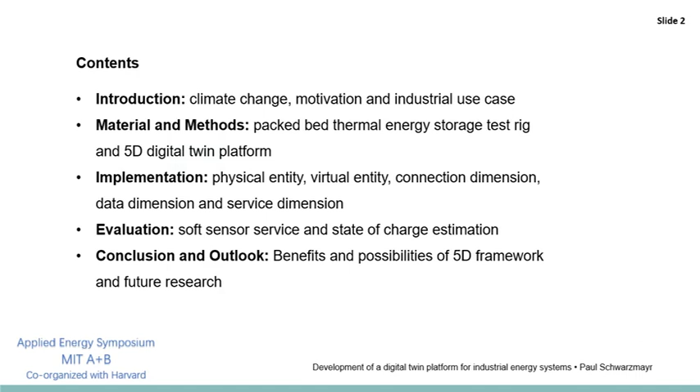To reach the goals defined in the Paris Agreement, global CO2 emissions need to be reduced by more than 75% until the year 2050. More than 40% of the CO2 emissions in 2019 were emitted by the industry sector. Nevertheless, there are existing technologies and technologies in their research phase which show high potential to reduce CO2 emissions of industrial processes by a fair amount.

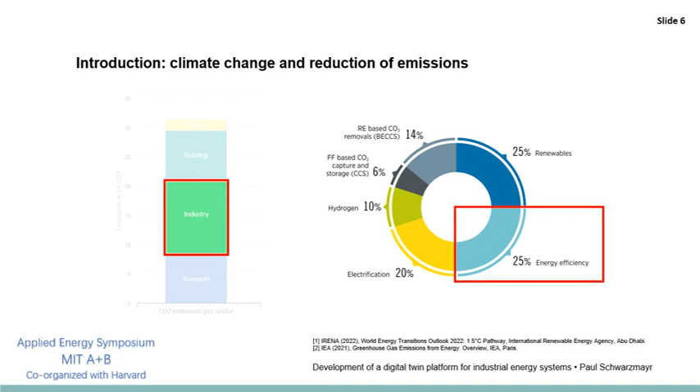As stated in the IRENA World Energy Transition Outlook, 50% of the CO2 emissions in the industry sector can be reduced by the transition to renewables and the increase of energy efficiency. In most industrial processes, an increase of energy efficiency can be achieved by the reduction of primary energy consumption and the recovery of waste heat. The fact that the generation of heat is often accompanied with a high exergy loss makes the recovery of waste heat even more important.

Let's consider a more tangible use case for this purpose. On this slide, the last few steps of a steel producing process, the so-called Linz-Donawitz or LD process, are depicted. The left side shows the current status of the process, which we will consider first. Besides the main product, steel, the LD process produces a considerable amount of slag and crucible gas.

The crucible gas, which exits the process and is mainly composed of carbon monoxide and a considerable dust load, is utilized in a cooling chimney to produce process steam via radiative heat exchangers. Due to the high dust load of the crucible gas, convective heat exchangers would erode quickly, and therefore a further cooling can only be realized by injecting water in an evaporation cooler, which results in a substantial amount of waste heat.

The idea to solve this issue is to replace the evaporation cooler with a packed bed thermal energy storage, which enables the storage and recovery of the waste heat in this process. In contrast to convective heat exchangers, the packed bed storage is insensitive to the high dust load of the process gas, and to make things even nicer, utilizes the slag produced by the LD process as storage material.

With all these advantages and benefits, there are also considerable difficulties and challenges which arise when operating a thermal energy storage under such rough conditions. That's why the main focus lies on the implementation of a digital twin for a lab-scale packed bed storage, which will provide a platform for specialized services like fault detection algorithms and adaptive simulation models.

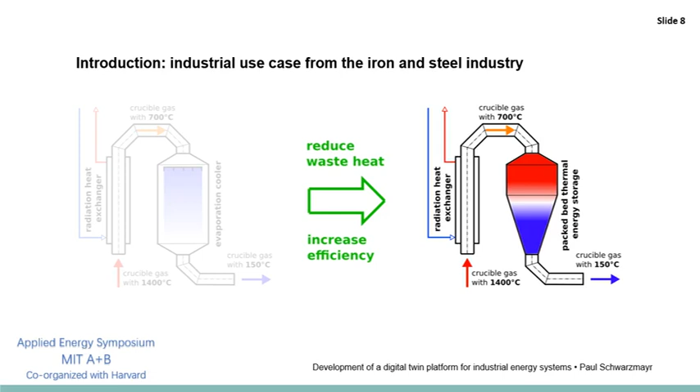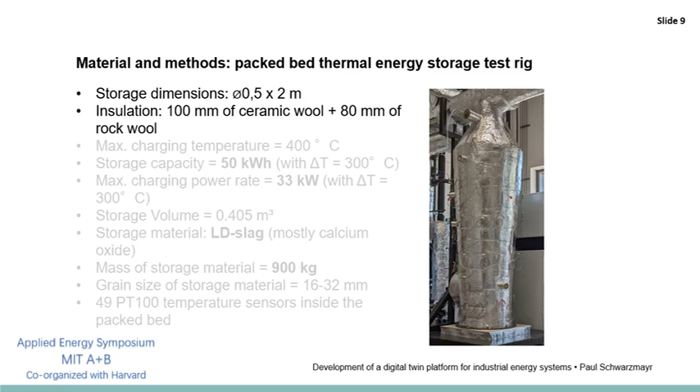Before I start with the implementation of the digital twin, I'm going to give you some detailed information about the test rig, which will be the physical entity of the digital twin. The packed bed thermal energy storage test rig, which was erected for this research project, consists of a cylindrical, slightly conical steel vessel with a diameter of 0.5 meters and a height of 2 meters. The maximum charging temperature of the test rig is 400 degrees Celsius.

When charging and discharging the storage with a temperature difference of 300 degrees Celsius, the storage capacity is 50 kilowatt hours and the maximum power rates are 33 kilowatts. The storage tank, which has a volume of about 0.4 cubic meters, is filled with 900 kilograms of slag as storage material.

The LD slag was chosen because it is a side product of the LD process and is therefore accompanied with zero costs, and additionally, the size, shape, and porosity of the LD slag makes it a very good storage material. To prepare the packed bed thermal energy storage for the deployment as a physical entity in a digital twin, it is equipped with 49 PT100 temperature sensors inside the packed bed.

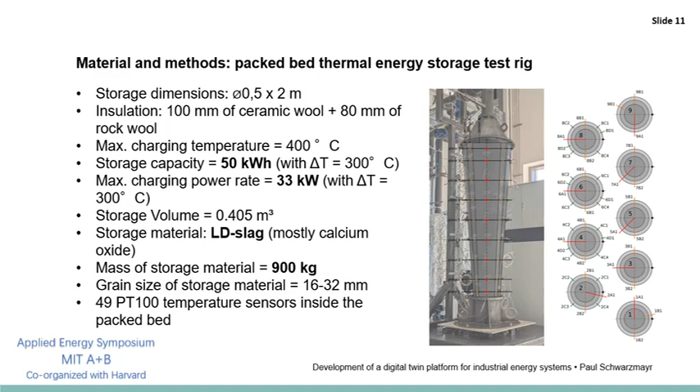This multitude of sensors allows for a detailed estimation of the temperature field, especially the location and shape of the thermocline inside the packed bed storage.

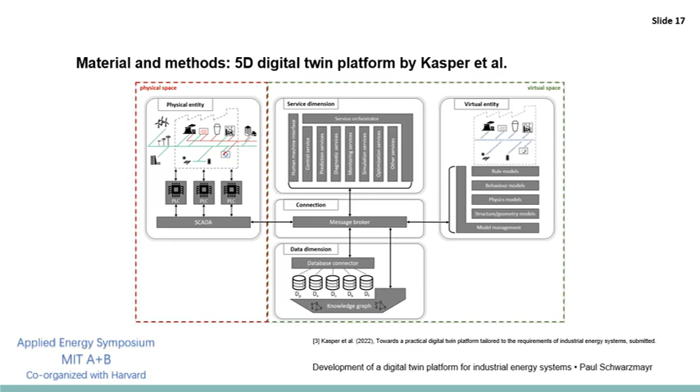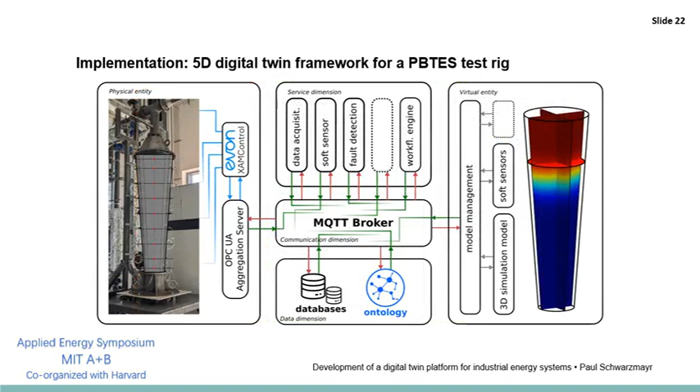For the modeling of the digital twin, I will use the 5D digital twin framework proposed by Kasper. As the name indicates, this platform consists of 5 different parts, which are all connected to each other via a central connection hub. For reasons of time, I will not go into more detail here and refer to the publication of Kasper. Applied to the present use case, the packed bed test rig, the 5D framework can look something like this. Actually, this is the current status of our work, which we will now take a closer look at.

The physical entity consists of the packed bed thermal energy storage test rig, which is equipped with 49 temperature sensors. The SCADA system, which is also part of the 5D physical entity, consists of XAM control and an OPC UA aggregation server. XAM control is responsible for data acquisition and process control and hosts all the observed measurements to the aggregation server via OPC UA.

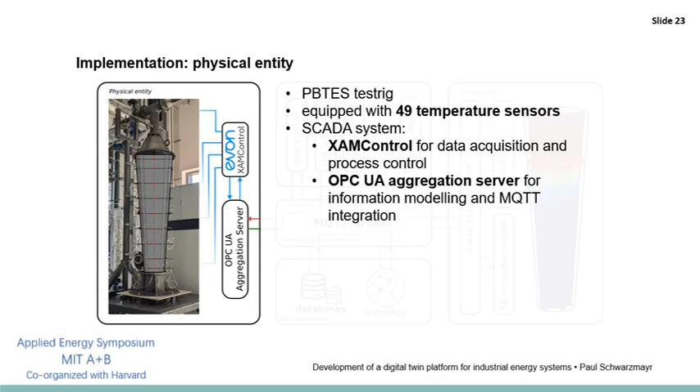The virtual entity consists of a three-dimensional thermal model of the packed bed storage. The model uses the finite element method and is based on the heat equation and other energy balances for losses and the energy in and outputs during charging and discharging of the storage. To increase the flexibility of the model, it is not designed as a 100% physical model, but as a hybrid model. This means that there are certain characteristic parameters like the heat capacity of the storage material or the heat transfer coefficient between the packed bed and the process gas, which can be adapted via data-driven methods.

Additionally, the virtual entity also includes soft sensors. These are purely data-driven models, which are modeled and trained on demand based on runtime data and domain knowledge provided by the ontology.

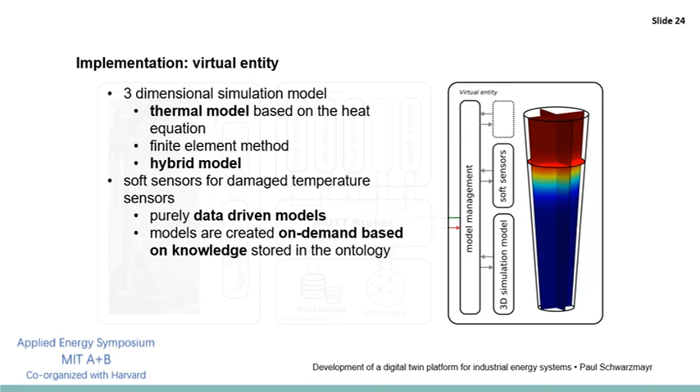For the realization of the connection dimension, an MQTT message broker is chosen. MQTT is a topic-based publish-subscribe network protocol that enables the transportation of messages and data between devices, or in our case, the dimensions of the digital twin. Each of the other 4 dimensions and their subservices are connected to the broker as clients. Every client connected to the broker can subscribe and/or publish to different topics defined by the broker. The MQTT broker is responsible for receiving messages, filtering them, and sending them to subscribed clients. To allow subscribed clients the proper processing of received messages, every publishing client has to follow a certain naming convention of the message payload.

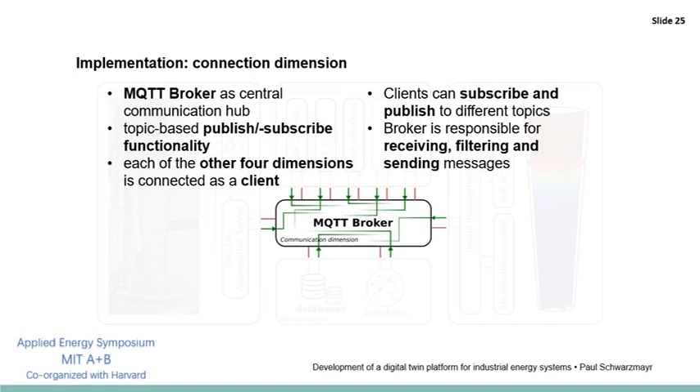For integration and centralized storage of runtime data and domain knowledge, the next important dimension of the digital twin is the data dimension. In our case, the data dimension consists of a relational SQL database and 2 ontologies. In the SQL database, the runtime data for the physical entity, and some important metrics like the power rate or the state of charge, which are calculated from the runtime data, are stored.

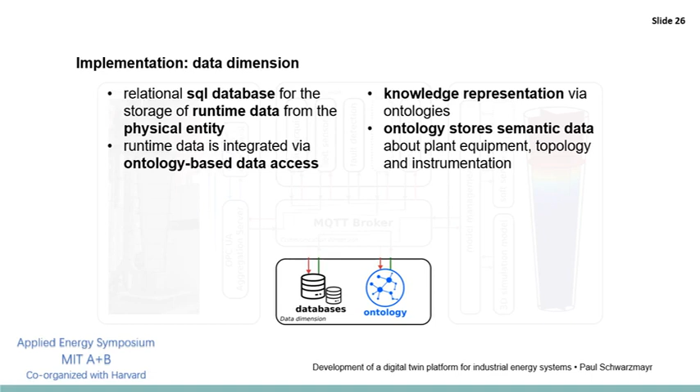Information about the number of sensors and their location in the packed bed in relation to each other, and information about certain events like the occurrence of an error are stored in the ontology in a machine-readable way. The ontologies also integrate runtime data from the SQL database via ontology-based data access. This allows the other 4 dimensions and their subservices to access runtime data via semantic queries without having information about the structure of the relational database.

The dimension of the digital twin which is the service dimension holds all the specialized services for the digital twin, which contribute to an enhanced operation of the physical entity. In the current status of the digital twin, the service dimension is composed of a data acquisition service, a soft sensor service, a prototype fault detection service, and a workflow engine. This service portfolio will be extended with further services in the future.

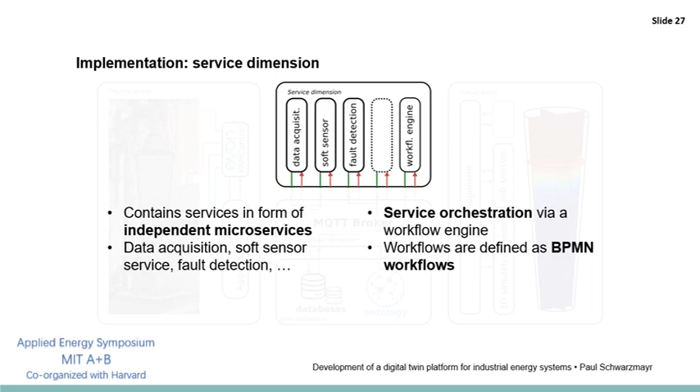For the management of the interaction and communication between all these services, the most important part of the service dimension is the workflow engine. The workflow engine can execute workflows which are defined and formulated in a graphical process flow language called BPMN. The workflow engine maps the topics defined by the MQTT broker to each other and executes services as it is formulated in the BPMN workflows. This way, services can be engineered and developed as standalone microservices independent of the rest of the framework. The only thing which is application specific is the naming convention of the MQTT broker.

To point out the benefits of this implementation, I want to discuss a simple scenario. This scenario starts with the packed bed storage operating under normal conditions according to a schedule. This schedule is determined by an operational optimization service. The accuracy of the results of this optimization service strongly depends on the quality of the simulation models in the virtual entity and the state of charge estimation.

Let's consider a scenario where a temperature sensor in the physical entity gets damaged and delivers a constant value of 0 degrees Celsius. This failure will lead to a significant error in the state of charge calculation, which propagates to following services and makes the output of the operational optimization inaccurate or even useless. To still maintain a proper operation and management of the storage, the measured value of the damaged sensor needs to be corrected as soon as possible.

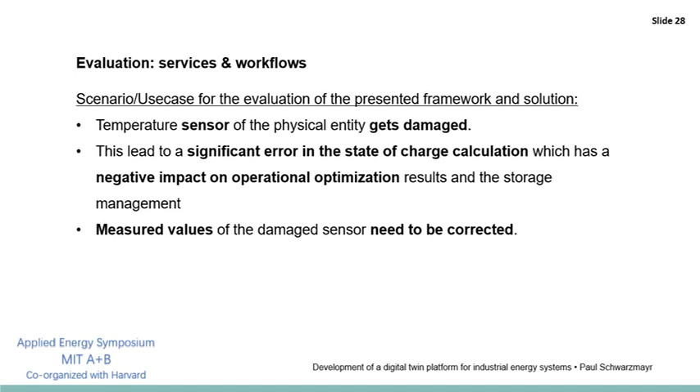This workflow is started when a message on the topic temperature sensor value is received by the MQTT broker. In the presented case, this message is published by the aggregation server. In the next step, the data acquisition service is executed as it is defined in the BPMN workflow. This service gets an array of real-time data via the payload of the MQTT message from the aggregation server.

Before storing the received data in the Digital Twins database, the data acquisition service requests information about damaged sensors via a SPARQL query to the ontology. If the response of the ontology says that there is a damaged sensor, the data acquisition service fetches a soft sensor model for the damaged sensor from the virtual entity. It then overrides the measurement of the damaged sensor with the reproduced value from the soft sensor model and stores the preprocessed data in the Digital Twins database.

After finishing all calculations and tasks, the data acquisition service publishes this information to the MQTT broker, which continues and ends its workflow. The next service and workflow I'm going to discuss is the fault detection service. In contrast to the data acquisition workflow, this workflow is started every 10 minutes by the workflow engine. As defined in this workflow, the fault detection service is triggered, which first fetches runtime data from the past 10 minutes via a SPARQL query to the ontology. The ontology provides this data, which is actually stored in the Digital Twins database via ontology-based data access.

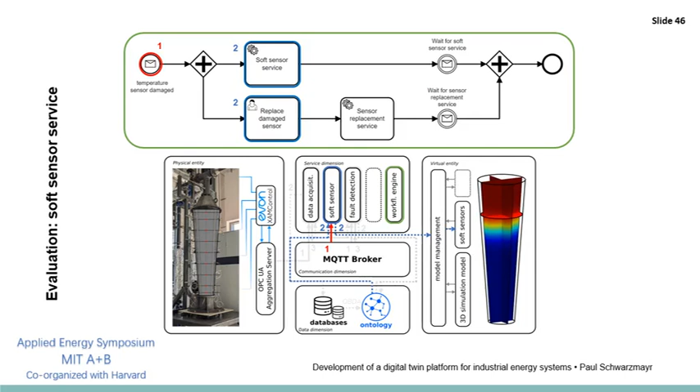Based on the information in the ontology's request and runtime data from the Digital Twins database, the soft sensor service starts the training of a regression model, which we call a soft sensor, and stores it in the virtual entity. This soft sensor can be used by other services to reproduce the true value of a damaged sensor based on the measurements of nearby sensors.

After some time, when the machine operator changed the damaged sensor with a new one and completes the user tasks, the second branch of this workflow continues. This information about the newly installed sensor is transferred to the ontology by closing the error interval of the before damaged and now exchanged sensor. When both workflow branches have confirmed that they are done, the whole workflow is ended by the workflow engine.

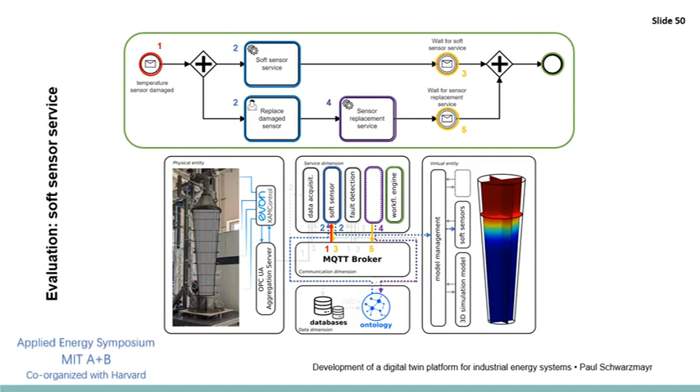Of course, the tasks which were included in the presented scenario could also be done by one macro application that takes care of all the sub-tasks at once. The goal of this work, and in general of digital twins, is not to reinvent SCADA systems, but to provide a standardized and scalable platform for specialized services and applications. The division of the digital twin into 5 dimensions allows experts from different areas to develop their services and models as independent micro-applications and to integrate them into a uniform framework via standardized interfaces.

Expert knowledge of engineers and machine operators and information gathered from observing historic data can be centrally stored in the digital twin's data dimension via ontologies. The MQTT broker in the communication dimension enables the interaction of various services via a standardized communication channel and supports the implementation of a workflow engine with its topic-based publish-subscribe functionality. Especially for the cooperation of experts in the field of computer engineering with experts in the field of thermal engineering, the service dimension with its main part, the workflow engine, provides a perfect interface.

The virtual representation of the physical entity in the virtual space in the form of models of different type and complexity lays a foundation for the extension of the digital twin service dimension with sophisticated methods and algorithms. Some examples which we will develop and investigate in future research are services for online model adaptation, which combines physical and data-driven modeling methods to keep models up to date, which is necessary for a proper storage management. Further, the use of transfer learning would allow the training of sophisticated classification models for fault detection in the virtual space and their deployment and utilization in the physical space.

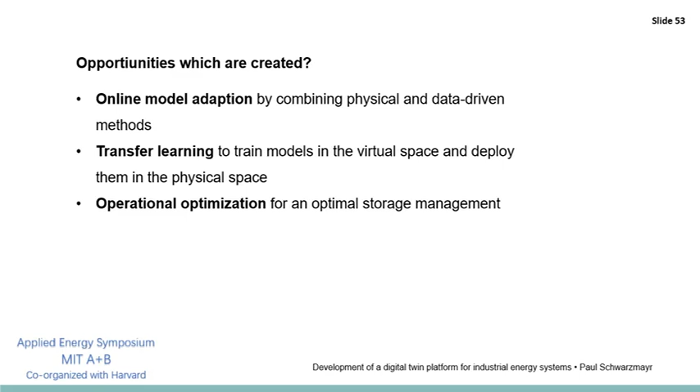Another research focus will be the development of models for operational optimization, which benefit from the knowledge provided by the ontologies and the always up-to-date simulation models of the physical entity. For detailed information about the presented use case and the 5D twin platform, I refer to the conference paper Development of a Digital Twin Platform for Industrial Energy Systems, which will be published after this symposium in the conference proceedings.